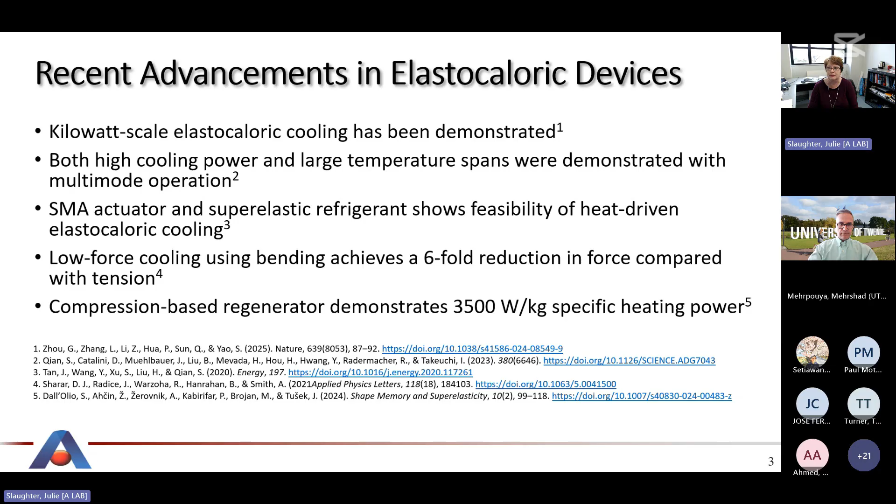So then you apply a field, the material heats up, and then you transfer that heat to an external heat exchanger. Then your material is back to that ambient temperature. Then when you remove the field, it cools off.

So now you're cooler than you started, and then you absorb heat from a load, another heat exchanger there. So you go through that cycle, and you can build up a temperature span larger than the material itself. If the material's own delta T is 5 degrees Kelvin, you can generate a temperature span 3 to 4 times that quite easily—so 15 to 20 Kelvin. That's a reasonable span for refrigeration, air conditioning, and heating. So that's a basic description of active elastocaloric regeneration.

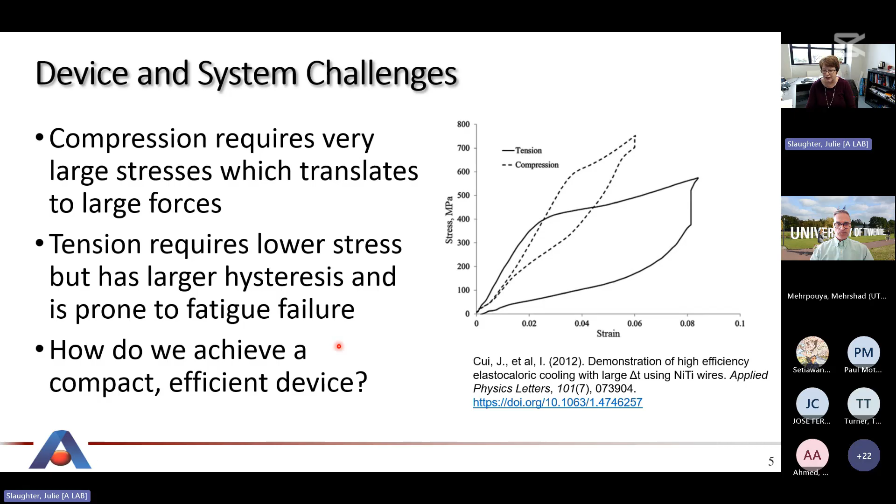So we're looking at how to achieve a compact, efficient device with the materials we have today. I want to start by talking about that big heavy piece of the system, the actuator—how do you apply the fields? A basic comparison is the energy density of the elastocaloric material, what it requires, versus what actuators are available.

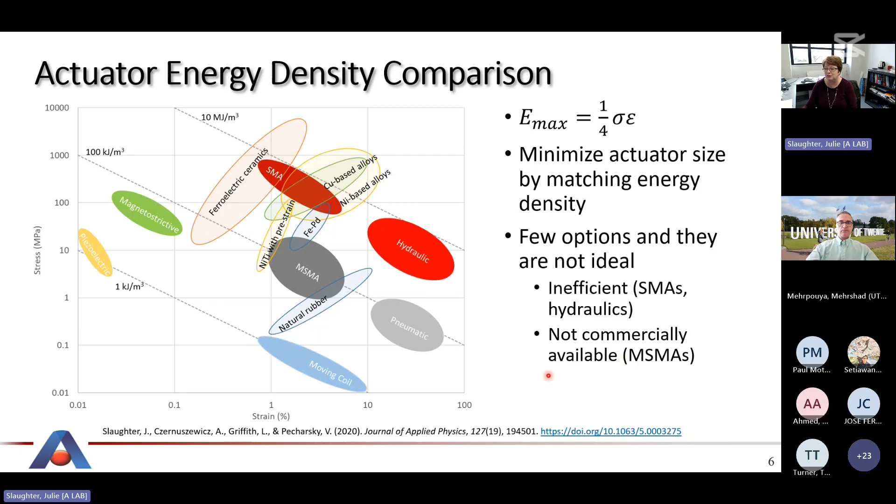None of them are ideal. The two that kind of fall in the best category here, shape memory alloys and hydraulics, are not very efficient. And then magnetic shape memory alloys are not commercially available. Pneumatics, again, not very efficient. So we need another metric to look at here.

So we're going to look at power density next, and this brings frequency into the equation. This kind of takes advantage of the fact that you can operate indirectly on the elastocaloric material at the system level, gearboxes, lever arms, things like that. So this brings rotary motors into the actuation. You're not just working with something that directly stretches or compresses the material.

So here, rotary motors are actually a really good fit because you can change the frequency with the gearbox. That makes them, and they're ubiquitous, so that's kind of where we're leaning to drive this, is how do you figure out how to use rotary motors. You don't want to use magnetostriction or piezoelectric. There's not a good way to translate the frequency into power density.

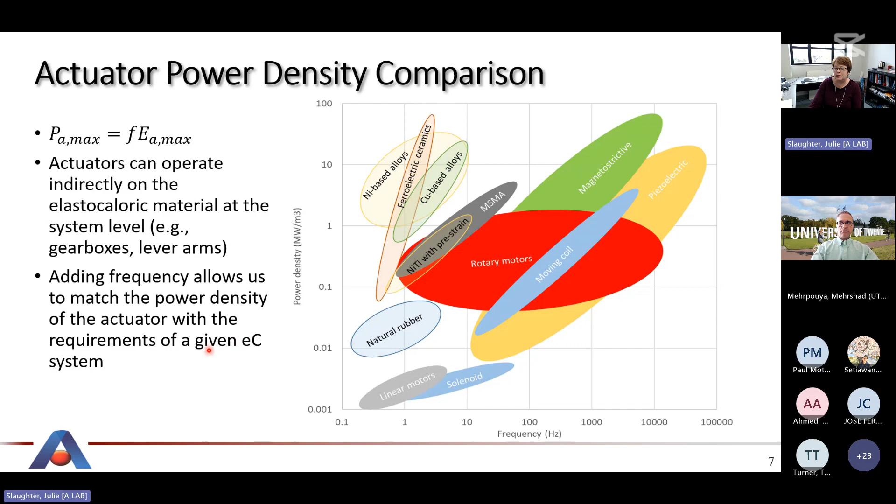So that's just a couple different ways to look at how you design the system and how you match actuators. So really, when you approach the device design, the materials inherently have a high power density. And so you really want the actuator power density to match that as best it can, so that you can minimize the size of the system.

And then another important point is that energy recovery and pre-strain can help minimize the size of the driver. What we mean by this is when one elastocaloric element is loading, another one is unloading, so you're recovering that mechanical energy.

Second point I want to look at here is at this initial stage of developing new technology, we need to see what materials are out there, what can we use that's off the shelf. Super elastic nickel titanium materials are commercially available in several different forms: wires, sheets, tubes. There's probably even billets, but this is really tailored for medical applications. So right now it's expensive, but what I want to point out here is there is a growing interest in tailoring materials for heat pump applications.

So really, I think the cost will come down, because if this takes off in heating and cooling, that's an enormous market that will in fact completely overwhelm medical applications. So I think there is interest from companies out there for that.

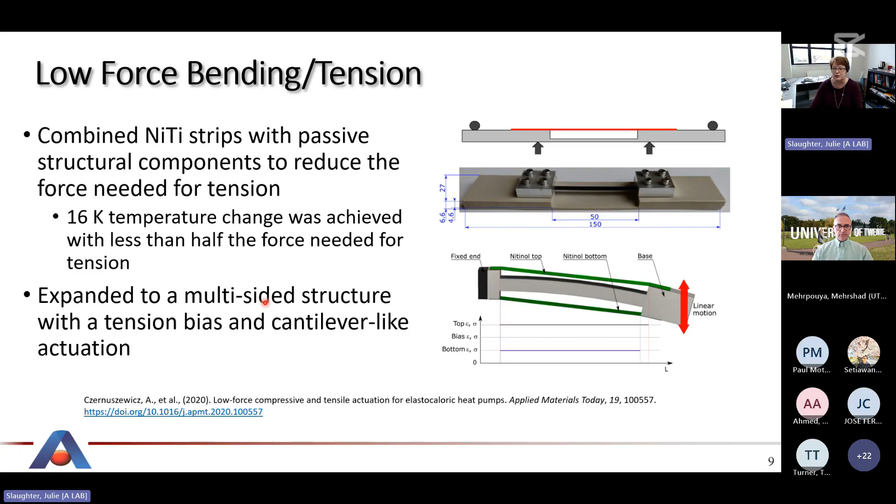So you actually now have multiple elements, so you can have more of a continuous operation of the system. That's kind of where we started with some of our ideas on that. And we looked at this concept and said, okay, are we achieving high power density? How is this at the system level?

And so we want to at least be at that same level for elastocalorics in order to really start to be a commercially viable system. So what we looked at in this double-sided structure is how much material volume, and we ignored a lot of the structure, but we did say, okay, what is the active material volume to motor ratio? And we achieved a very good result of just under 4 to 1.

Looking at some of the other systems, one was a heat-driven system, the other used Terfenol-D, a magnetostrictive material. So you can see we're actually in really good shape. There are other systems out there that are probably much better. This was a fairly old result, so I'm sure everything has improved by this time. But that's really where we're aiming, to get to that same type of ratio for the motor volume to the active material volume.

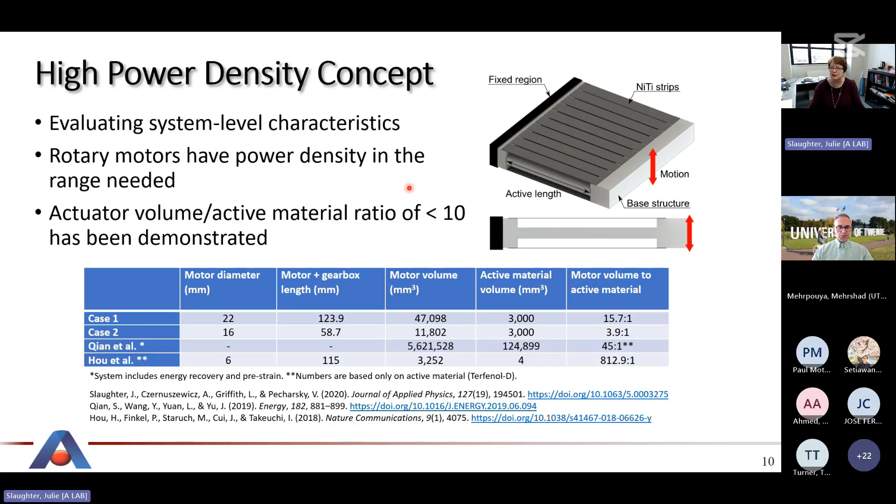Now I want to talk specifically about one of the projects we have here at Ames Lab, and this is elastocaloric cooling for military vehicles. What I want to point out here is the military has a strong pain point. Their current refrigerants are being phased out, but the leading alternative for vehicle air conditioning has a risk of sustained burning, which I guess they've decided is okay for passenger vehicles, but that's not acceptable for military applications. They're also concerned about other refrigerant blends that break down into harmful chemicals such as PFAS. So this is their motivation for wanting something different.

Our project was selected for funding under this, and we're evaluating elastocaloric cooling with 3 main goals. One is to optimize nitinol alloys for cooling, and our main goal there is to reduce the stress-strain hysteresis and fatigue while still maximizing caloric performance. Second is to demonstrate active regeneration and see if we can meet the temperature span and efficiency requirements. Third is to demonstrate a 500 watt system.

So that's where we are, we're in the middle of this, working on all three efforts right now. A little bit of what we've done for the materials: we're partnering with a couple different companies, ATI and GRAL, who we're working with to optimize the materials. The material we selected already has low inclusions and good fatigue.

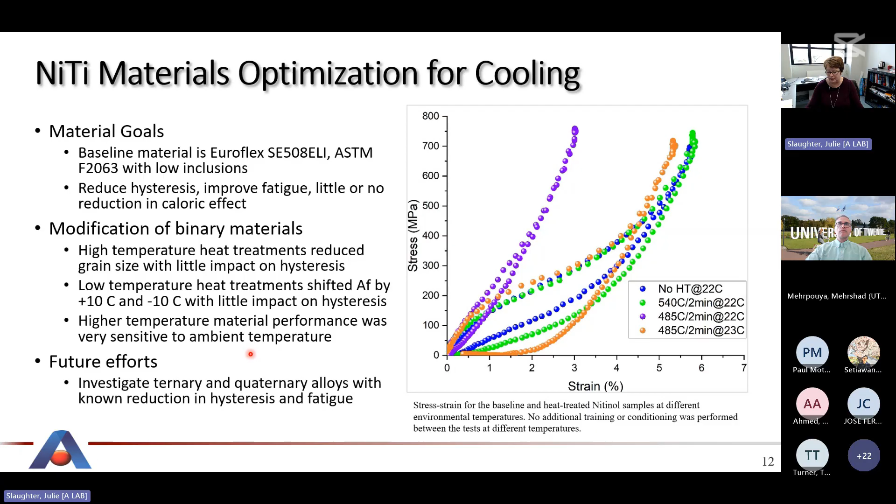We are going to start moving to ternary and quaternary alloys to reduce the hysteresis and fatigue. So that's really where we are with our materials effort.

Then we're going to move to the active regenerator design concept. This is a little complicated, but what we've done is taken our bending tension concept, where we have this passive beam in blue. We're applying a bending moment. This is a fixed end. And then we have a stack of plates, so instead of just having one single plate on each side, we're actually putting tension on a whole entire stack of plates.

What this does is a couple things for us. One, it increases the amount of active material we have in our structure. Secondly, it makes a nice parallel plate heat exchanger, so this is a good structure for heat exchange. To address the fatigue issue, we're really operating at a bias strain and then operating a fairly low oscillating strain around that.

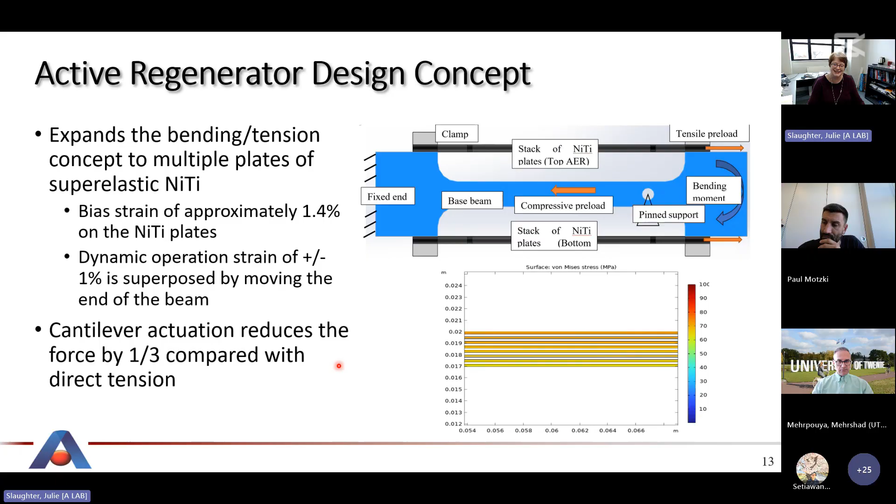So we have a strain of 1.4% that's a bias, and then we're plus or minus 1% on that. That gives us a temperature change in the material of about 5 to 6 degrees Kelvin, which is sufficient for our ultimate goal. In our finite element analysis, we found we've got about 2/3 of the force that would be needed for direct tension, so we've reduced it by 1/3, meaning it's 67% of what we would use otherwise.

So we did some active regenerator modeling. Our target for a single regenerator is 125 watts at 0 span and 25 watts at 25K span. The plate thickness we have is 200 microns thick, with 50% porosity, so they're spaced 200 microns apart. With 100 grams of nickel titanium, we can exceed that target performance we're looking for.

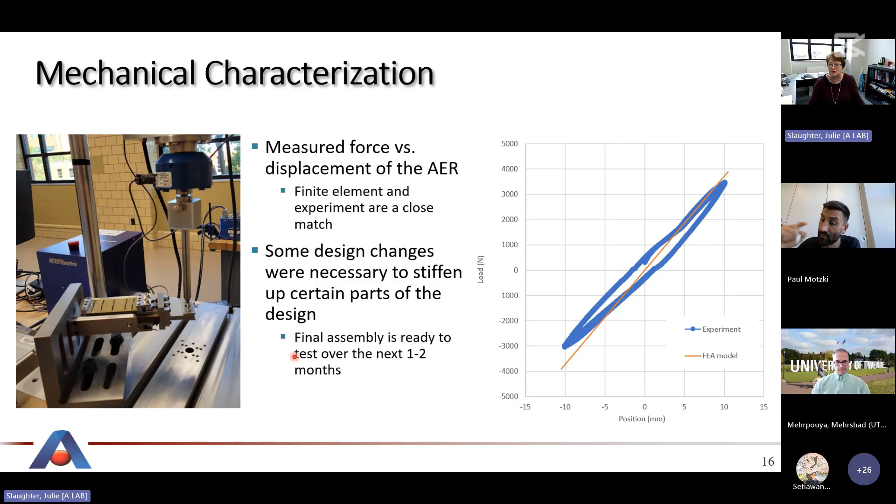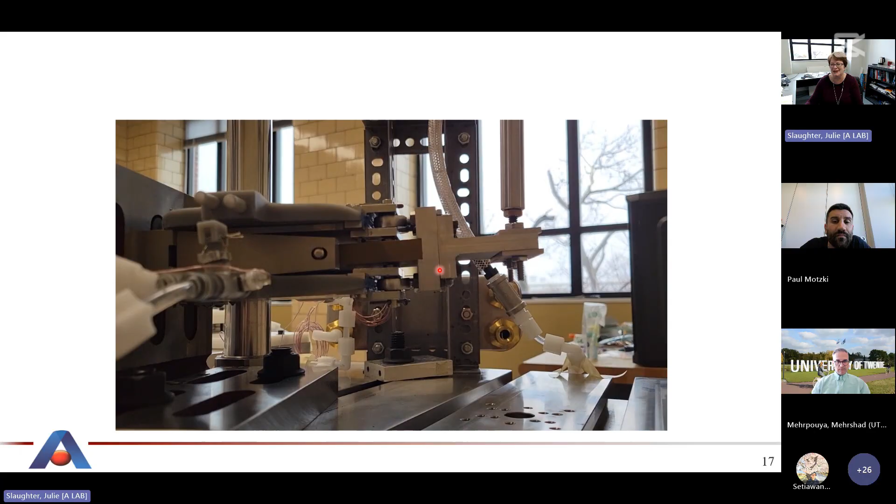Let's see if the movie will actually work. So this is the thing in action. You can see right here, there's a mechanical joint opening up and loosening, and if you look, there's a drip of water underneath. So right now we're struggling with sealing the fluid connections and having a little bit of mechanical problems.

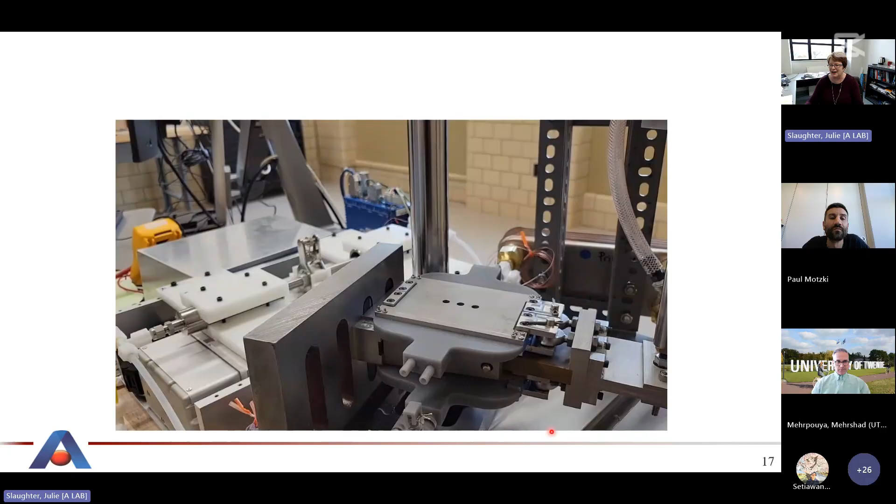But that's where we are today. So we're in the midst of fixing those issues right now, finding the seals and making sure that we can get this to work. So it's a challenge, but we're getting there.

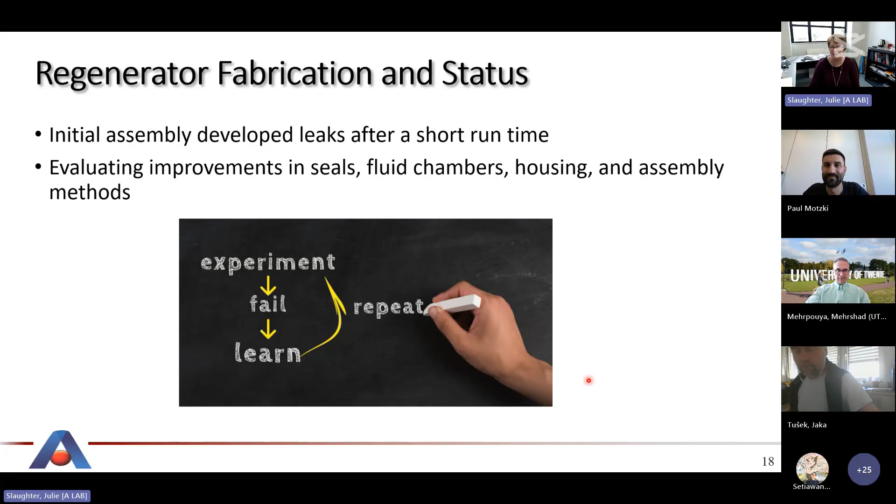In the meantime, we're looking at that next level. What does the system look like? It's going to have multiples of these regenerators. They're probably not going to look exactly the same, but this is a kind of cartoon of the final size of 500 watts. If we reach our 125 watt goal, we'll require 4 regenerators.

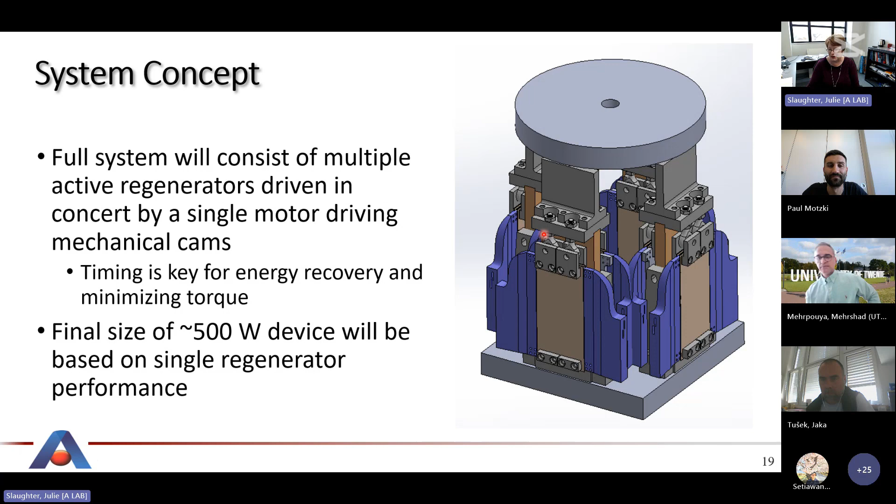So the next thing we looked at is how do we achieve energy recovery with that, because if you drive all 4 of those at once, you're just going to increase the amount of torque you need by a factor of 4. You can do a little better than that if you have, say, a single cam with 3 lobes, which can reduce it by half. But you're still not getting true energy recovery, so what we're looking at now is driving each of those regenerators independently.

So we can actually demonstrate, and this is just models at this point, that we are getting some energy recovery from the system. I think this would be improved if you had more regenerators and improved the timing even more. So that's kind of where we're starting with that.

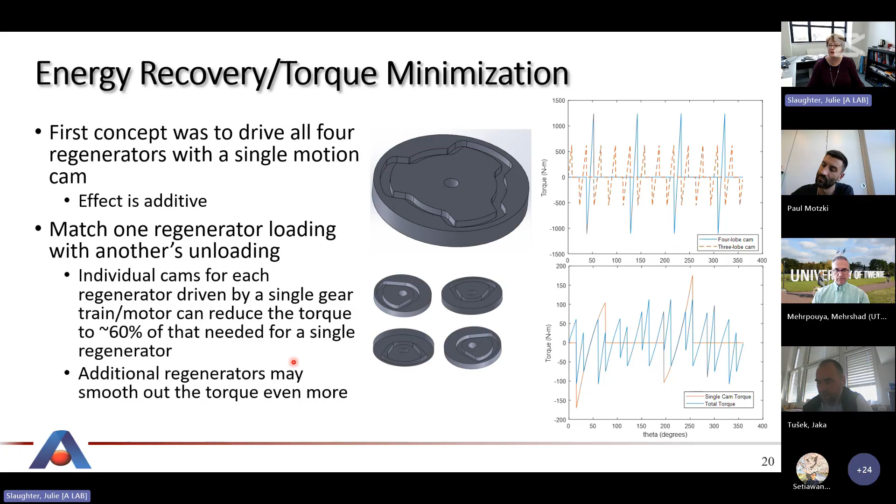I did want to just mention, not going into any details on this, but we are working with a small company that's using bending, which is an even lower force.

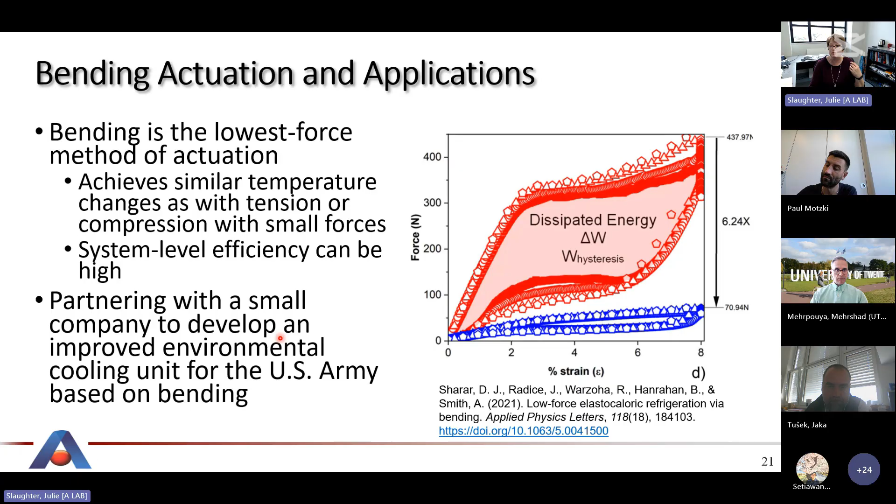I mean, direct bending of the nitinol. And this, you know, you still can get a 6 times reduction in force, and get the same temperature change in the material. So we're partnering with a small company that's developing some cooling systems for U.S. military based on that concept. So there are some good, exciting things.

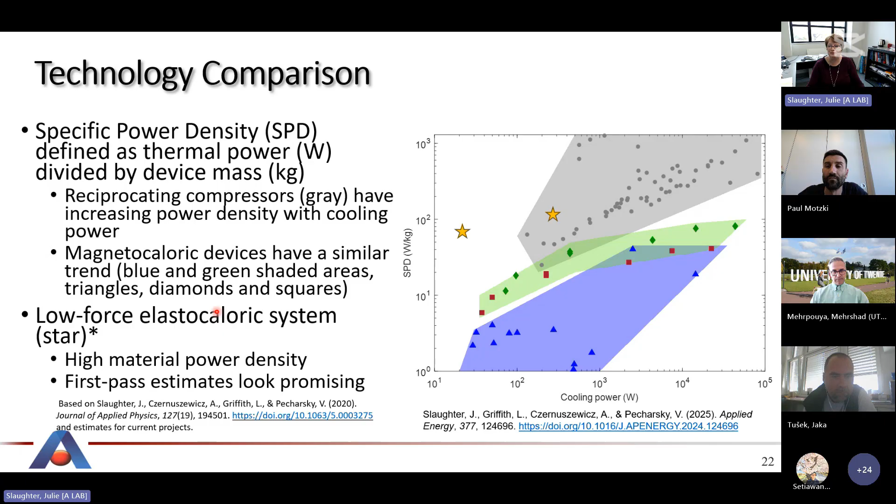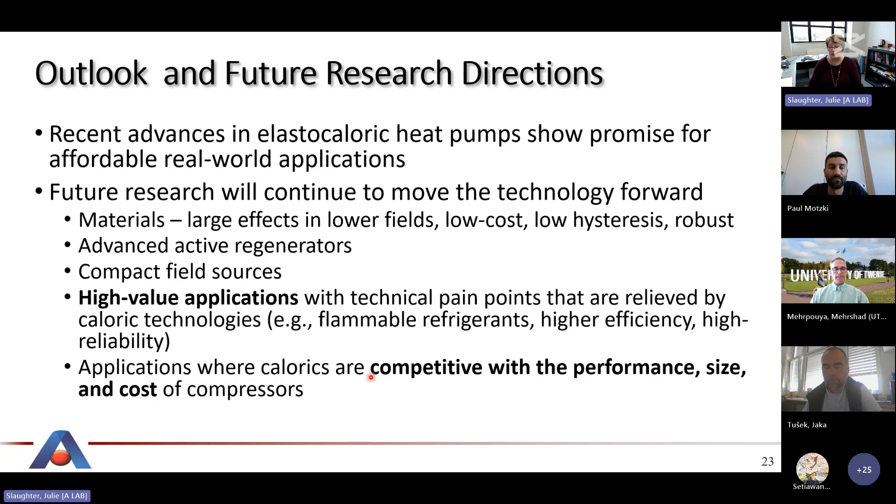So, wrapping up here, outlook and future directions. There's a lot of recent advances that show promise for real world applications, but there's still improvements needed in the materials, improvements in regenerators, a lot of different issues and approaches out there. Some people are using compression on tubes and different configurations. So really there's a lot of options and good directions moving forward. I want to point out that if we're looking for applications, let's start with high value applications where they have a pain point, particularly like our military applications. And then second, where is it competitive with performance, size, and cost? So I'm going to leave it with that.

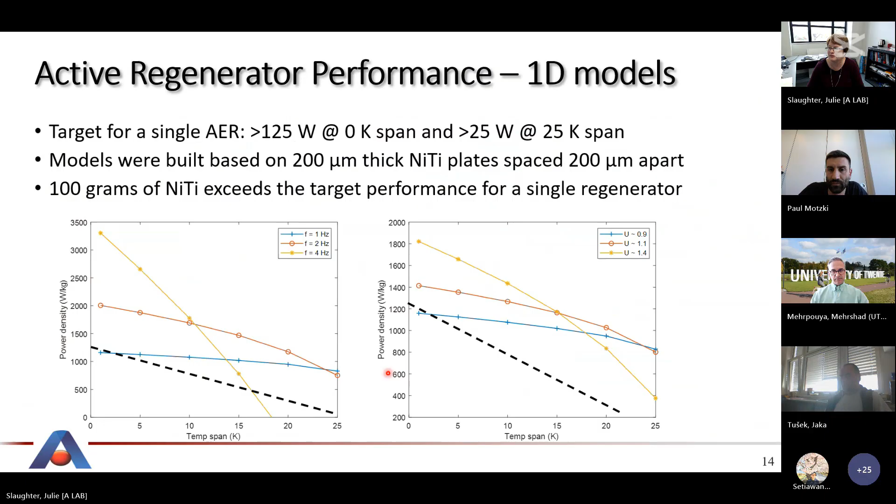Okay, that's a great question. So what makes them good heat exchangers? Let's go here. Because it's a solid metal, you need it to be in a porous form. This is why when we have multiple plates, you now have a parallel plated heat exchanger. So what you do is you're flowing a fluid through that porous structure. And then there is an external heat exchanger that exchanges the heat with the environment. So it's a two-step process: one, you're absorbing the heat from the active material, and then you're expelling that heat through a secondary heat exchanger to the environment, if that makes sense.

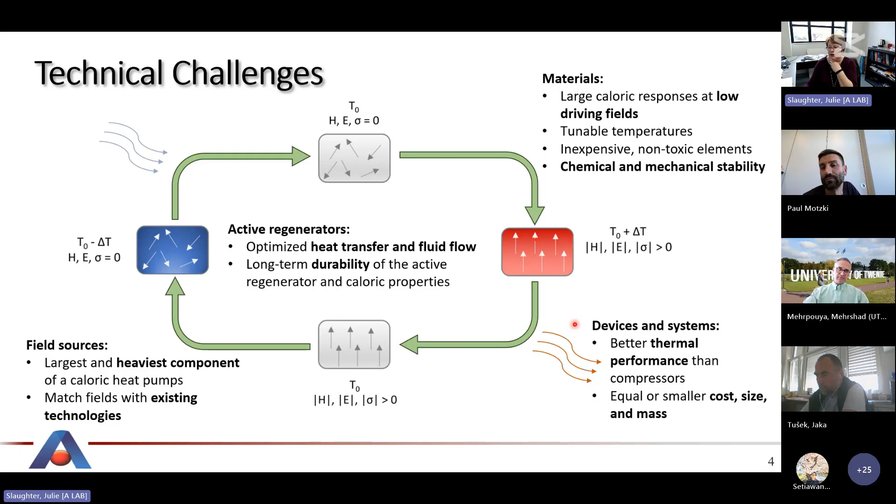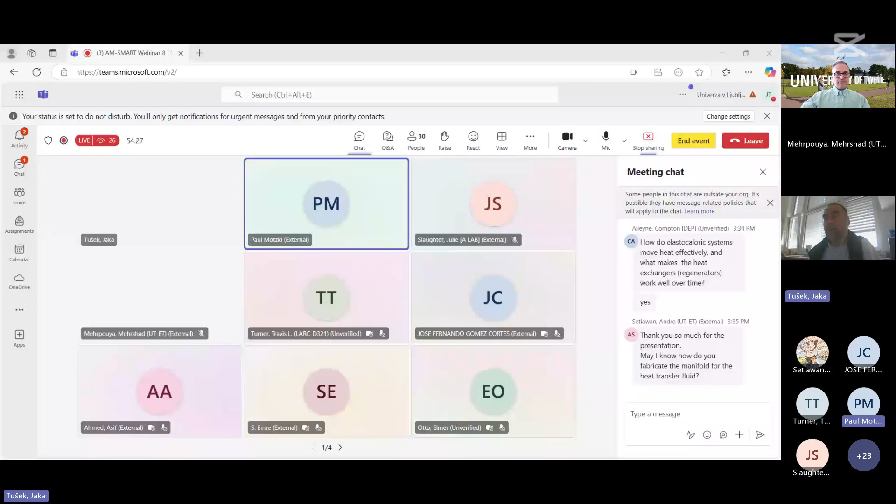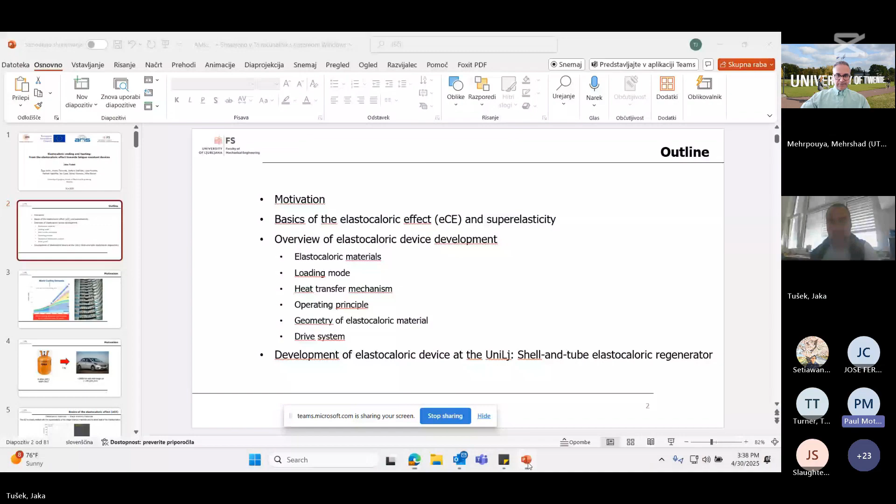Hello, can you see me and hear me well? Okay, and you can also see my screen, I hope. Right now we see the Teams window. That's strange. Let's try again. Entire screen - yeah, sorry, okay, now it should work. Is it coming? Yes, now it's your view, not the presentation. Yes, now it's in presenter mode. Okay, perfect. Thank you, and first of all, sorry for the delay - I had some issues with restarting the computer and updating Teams. So thanks, Julie, for stepping up.

Okay, so thanks for the introduction and for the invitation, of course. It's my pleasure to be here and to give my talk at this seminar. So the talk will in principle be divided into three parts.

At the beginning, in the first part, I will very briefly talk about the motivation behind this work and the development of new refrigeration technology in general, and give the basics of the elastocaloric effect. Then in the second part, which will be the main part of the talk, I'll give an overview of different segments crucial for the development of efficient, powerful, and fatigue-resistant elastocaloric devices - from elastocaloric materials, loading modes, heat transfer mechanisms, operating principles, to geometries of elastocaloric materials, and finally the driving system.

In the third part, I will very briefly present the main results of the development of a fatigue-resistant elastocaloric regenerator, as a key element of the elastocaloric device, which was built and tested in our lab.

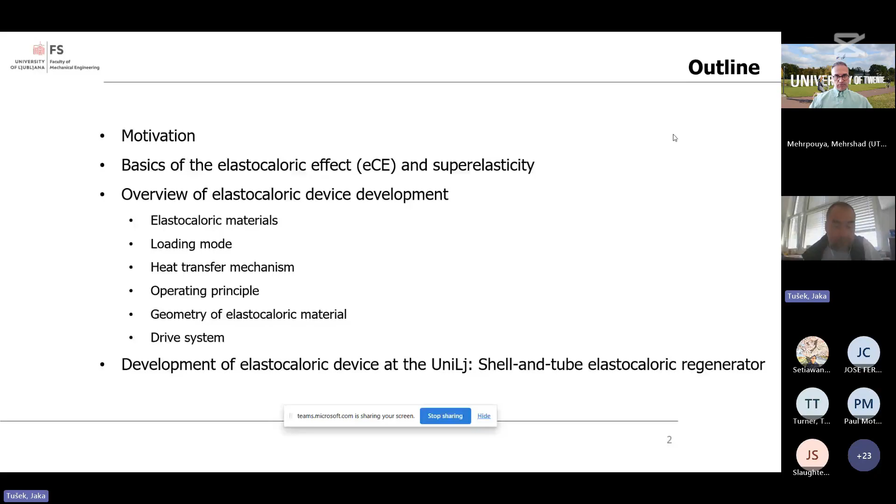So at the beginning, let's briefly say a couple of words about the motivation behind this work, and the motivation behind the development of new cooling technologies in general. As you can see from this plot, the energy demand for cooling and particularly air conditioning is growing exponentially and is projected to triple in the next 30 years.

But our standard cooling and heat pumping technology, called vapor compression technology, is old, relatively inefficient, and still uses environmentally harmful refrigerants. These refrigerants are no longer ozone-depleting chlorofluorocarbons, which caused significant problems 30 years ago, because these were phased out according to the Montreal Protocol and replaced by hydrofluorocarbons, which, as was demonstrated later, have enormous global warming potential.

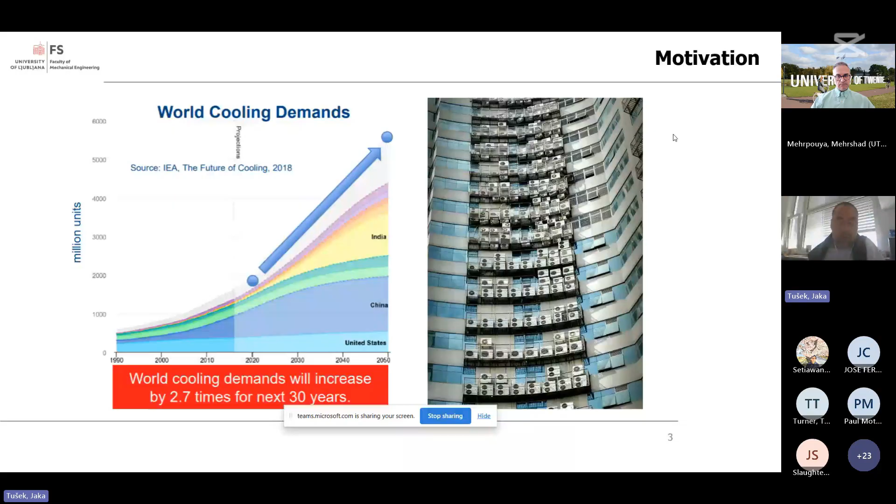I really like this example, which clearly shows that if only 1 kilogram of the most commonly used refrigerant at that time, R404A, leaks into the environment - and 1 kilogram is roughly the amount a typical air conditioning device contains - this causes CO2 emissions equivalent to driving about 30,000 kilometers with a mid-range car.

And people are always talking about how driving a car is problematic for the environment, but not talking so much about refrigerants. So following the Kigali Amendment to the Montreal Protocol, these refrigerants with enormous global warming potential, which can be several thousand times larger than CO2, will need to be phased out in the near future and replaced by natural refrigerants only.

These are either butane or propane, which are highly flammable and not allowed in larger quantities, or ammonia, which is toxic, or CO2, which has low efficiency in hot climates. So these are some very important limitations of both conventional refrigerants, such as hydrofluorocarbons, and natural refrigerants, which cause different safety issues. These are very serious limitations, and it's really a call for benign solid-state technologies.

Currently, so-called caloric cooling - among which we know magnetocaloric or magnetic refrigeration, electrocaloric, elastocaloric, and barocaloric - has shown, in the recent 5 to 10 years, the most potential for wide applications and as a real alternative to vapor compression technologies. So let's now focus on elastocalorics, which show some very promising results in recent years.

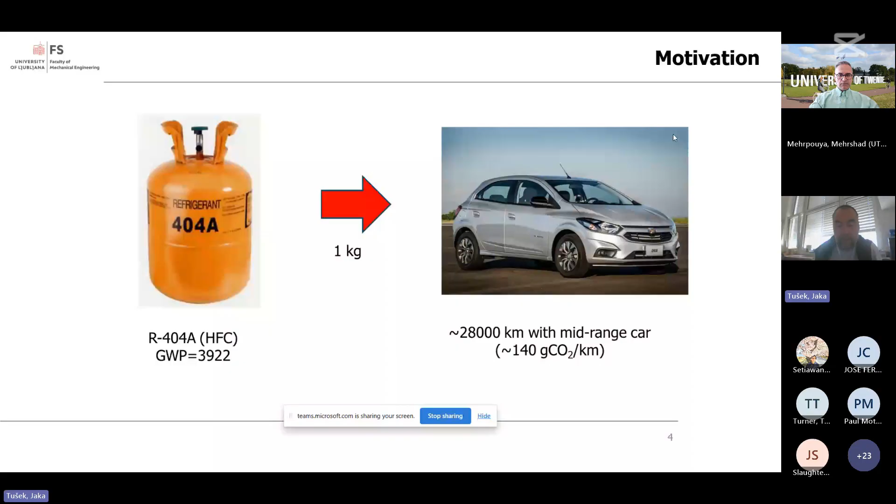So first, let's present briefly the elastocaloric effect, which is the basics of the elastocaloric technology. The elastocaloric effect is most pronounced in shape memory materials, due to Martensitic transformation, which enables two unique properties of shape memory alloys: superelasticity and shape memory effect. These are already widely applied in several engineering and biomedical applications.

The elastocaloric effect itself is closely related to the superelasticity of shape memory materials and its latent heat during the transformation. This stress-induced Martensitic transformation is exothermic and endothermic, causing latent heat release and absorption during reverse transformation. So essentially, all shape memory materials can be considered as potential elastocaloric materials.

The first step in the cycle is mechanical loading, so the material transforms from austenitic to martensitic phase. Because this is done at close to adiabatic conditions, the material heats up, and is then able to transfer this heat to the surroundings. Upon unloading, the reverse transformation occurs, the material cools down at adiabatic conditions, and this cold material is now able to absorb heat from the surroundings. If we constantly repeat those four basic operational steps, we can build a thermodynamic cycle and essentially a cooling or heating device around this elastocaloric effect.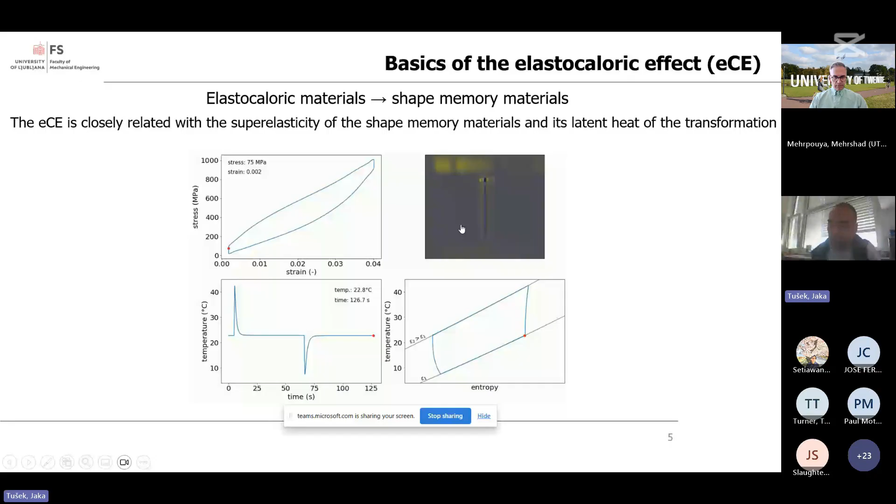This figure shows an overview of different segments that are crucial for the development of efficient, powerful, and fatigue-resistant elastocaloric devices. In this second part of my talk, I will go through all six segments in more detail, mostly based on our results, presenting an overview of the main challenges of these different segments.

The first thing to talk about is the elastocaloric materials. Since elastocaloric materials are essentially shape memory materials, we can divide them into groups just as in the case of shape memory materials: nickel titanium based alloys, copper based alloys, iron based alloys, magnetic shape memory alloys with both martensitic and ferromagnetic transitions, and also shape memory polymers.

The most widely used, both in terms of superelasticity and shape memory effect but also elastocaloric effect, is binary nickel titanium alloy, which can have very high adiabatic temperature changes up to 25 kelvins upon loading and unloading, but also requires relatively high stress for the transformation, and has very significant hysteresis, which is a disadvantage.

It was shown, for example, that copper-based or magnetic shape memory alloys can have much lower stress required for transformation and lower hysteresis, but also the adiabatic temperature changes are somewhat lower.

The story is different in polymers. The background is not Martensitic transformation, but rather the reorientation of polymeric chains. Polymers have very low transformation stress required, but also very significant strain. So it might be a bit unpractical that the elastocaloric device requires 600% strain, but the elastocaloric effect can be quite decent, up to 10 kelvins.

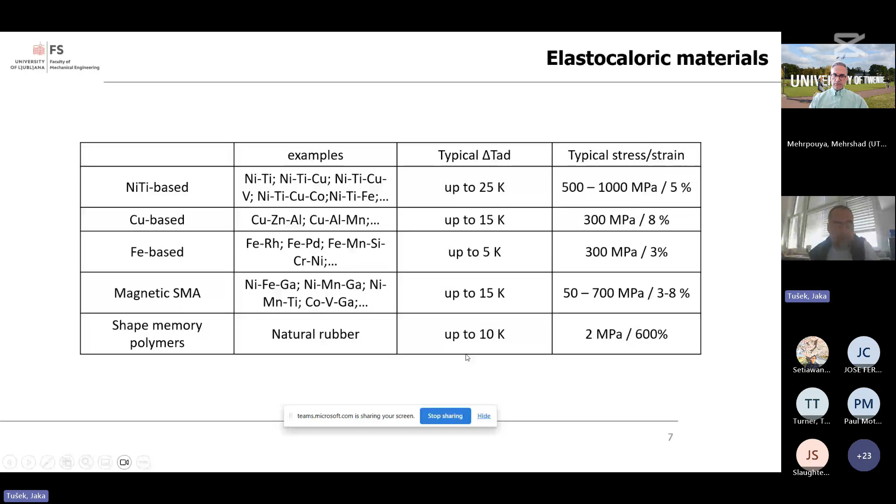It should be noted that nowadays elastocaloric materials, mainly binary nickel titanium alloy, have not been developed for elastocalorics, but for other applications such as actuators or biomedical applications. So it's not optimized for elastocalorics. There is significant room for improvement in the development of elastocaloric materials.

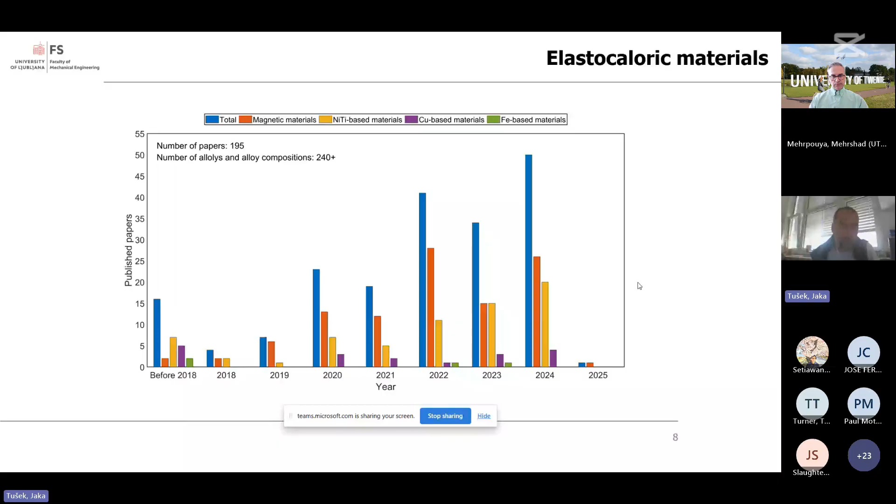This is a ratio between the latent heat of the transformation, which can be calculated through the adiabatic temperature changes, versus the hysteresis losses at adiabatic conditions. As such, the COP of material presents the maximal possible limit up to which a potential device could operate.

But in reality, the COP of the device is much smaller compared to the COP of material, because the device includes other losses as well, such as friction losses, viscous losses, heat transfer irreversibilities, and also the losses related to the enlargement of the temperature span along the device. So unfortunately, the COP of device will be lower than the COP of material.

So when people say the COP of elastocalorics can be up to 40, they normally talk about the COP of material and don't include other losses in their evaluations.

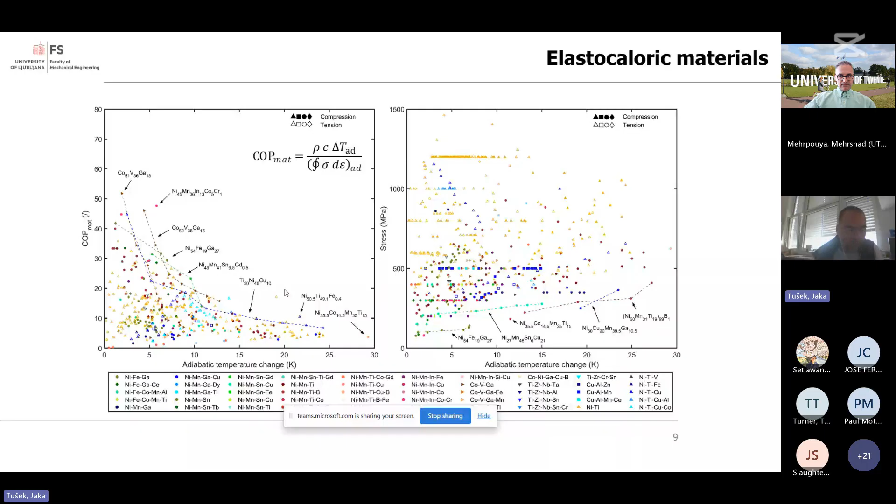Okay, the next important thing is the loading mode. In principle, we can distinguish between tension and compression loading. But from the engineering point of view, this means someone needs to deal with fatigue in case of tension, or with buckling in the case of compression.

Both tension and compression have some pros and cons for elastocaloric technology. The main advantage of tension loading is the ability to apply thin elements, so thin wires or thin sheets, with good heat transfer geometry, so thin walls, large specific heat transfer area, and so on.

While the main disadvantage of tension is reduced fatigue life, especially compared to compression. Because in tension, as shown here, any cracks or impurities in the material will already grow and expand during loading, while in compression, those cracks and impurities are getting closed, which can significantly prolong fatigue life.

But the problem is that it's impossible to simply compress a thin sheet or thin wire without buckling issues. So it's very challenging to come up with a geometry that can have efficient heat transfer but at the same time has buckling resistivity.

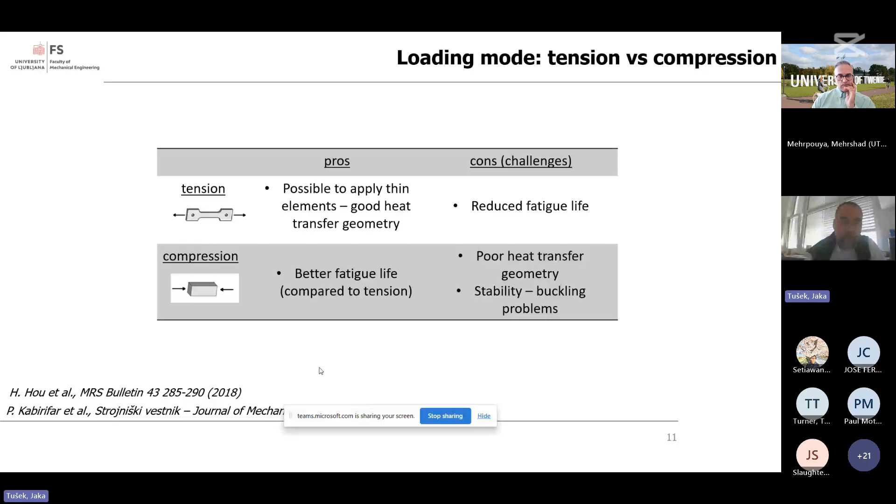But fatigue is not the only difference between tension and compression, as was shown before as well. It's well known that especially in nickel titanium alloys, there's significant tension-compression asymmetry. In tension, smaller stress is required for the transformation, but larger strain, while in compression, you need larger stress, but smaller strain. However, in both cases, if the transformation is completed, adiabatic temperature changes of about 25 kelvins can be achieved, but in compression you need larger stress for that, while in tension you need larger strain.

The difference is also in the homogeneity of the elastocaloric effect over the sample. In tension, the transformation proceeds through Lüders bands, which can be highly inhomogeneous, especially if only partial transformation is applied, while in compression, the transformation can be much more homogeneous, with homogeneous distribution of the adiabatic temperature changes over the sample.

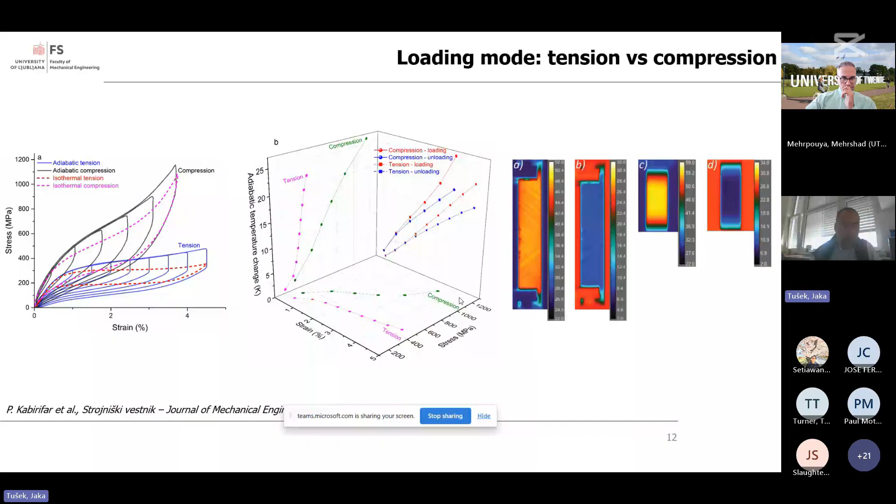So in recent years, an important part of our work has been focused on studying fatigue and buckling of elastocaloric materials. We have developed a new experimental setup for comprehensive fatigue testing of elastocaloric materials, where samples are monitored from one side with a thermal camera to measure temperature responses, and on the other side with a digital image correlation camera to measure strain distribution over the samples.

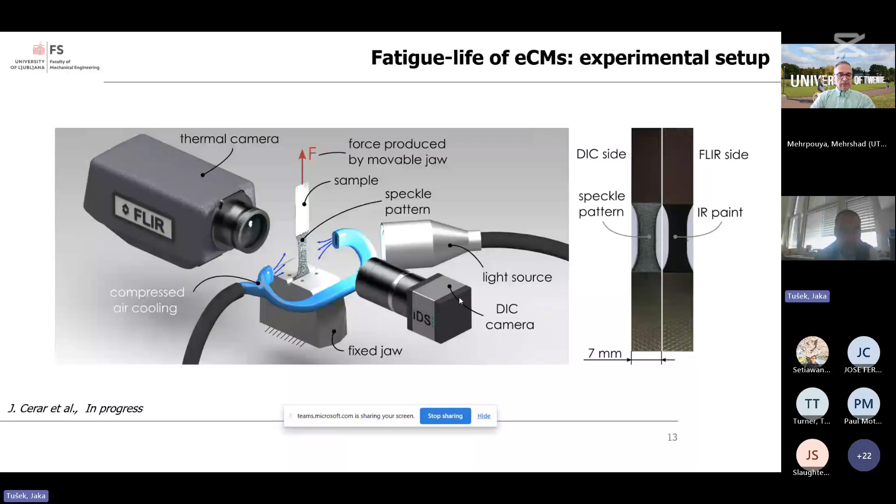We first studied fatigue in nickel titanium tubes in compression, but before any characterization, we first perform so-called mechanical stability or training of the material, where in the first 100 cycles there is quite significant degradation of both the elastocaloric effect and superelasticity. But after roughly 100 cycles, the response is stabilized and can be reproducible, which is crucial for elastocaloric devices.

So after training, we then subjected a couple of tubes to fatigue testing, and over almost the entire transformation plateau, all the tubes survived. The tubes were stable enough without buckling, which is a precondition for functional operation. And if they are stable, they don't show any structural fatigue up to 1 million cycles.

What was even more important and optimistic is that there was no functional fatigue either, because when comparing only trained and fatigued tubes, the elastocaloric effect was almost identical, which indicates that after training, there's no degradation of the elastocaloric effect, which is again crucial for elastocaloric devices.

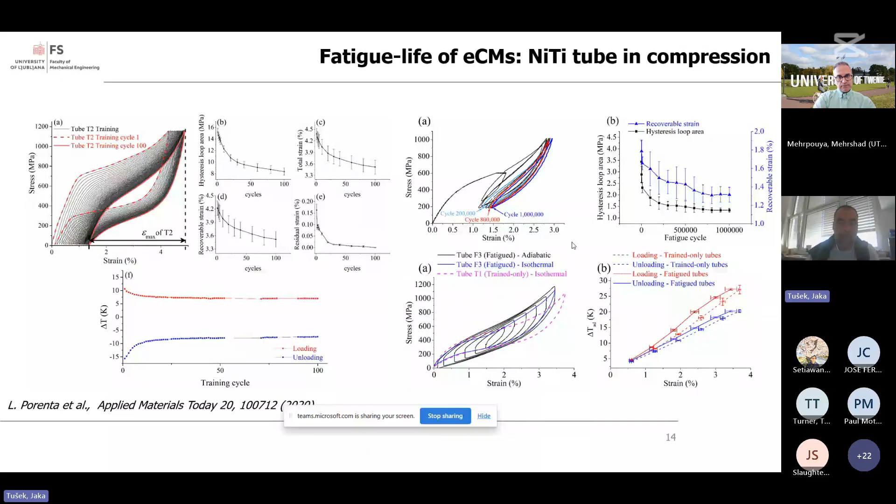The thing is, of course, things are much less straightforward in tension. We are currently running very comprehensive testing of nickel titanium sheets in tension. The idea is to systematically change the mean strain and strain amplitudes on the samples, while simultaneously measuring temperature changes and strain field over the sample.

An example of stress-strain response during cyclic loading is shown in this video, and this sample survived the run out, which was set at 1 million cycles. You can see local strain up to 5% and adiabatic temperature changes up to 7 kelvins, which is quite promising, but only locally. Of course, if the strain is larger, then at some point the sample fails due to crack propagation as shown here.

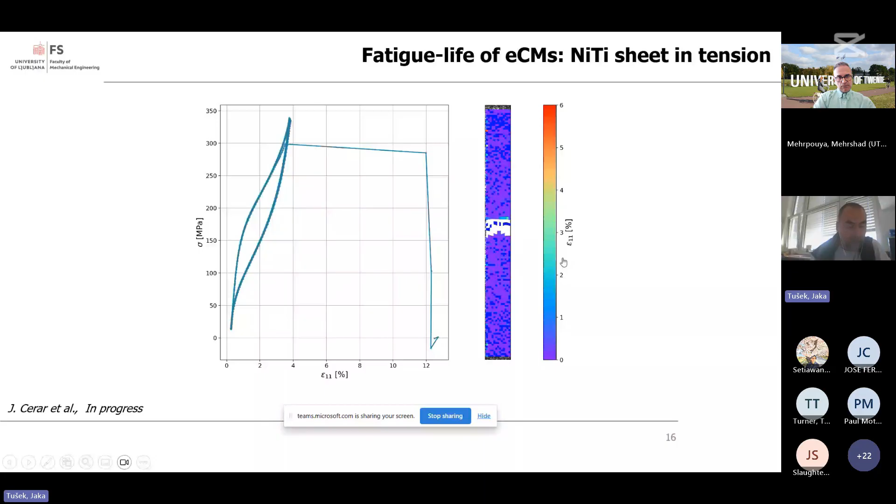Based on these results, we are currently constructing a Haigh diagram as shown here. Left-hand side shows pure compression, right-hand side shows pure tension. This plot shows the samples that survived in blue and that failed in red, meaning they didn't reach 1 million cycles. As you can see, in compression, all the samples cycled over almost the entire transformation plateau survived 1 million cycles, with adiabatic temperature changes up to 25 kelvins. Please note that due to asymmetry, the strain to complete the transformation is lower in compression compared to tension, while strain amplitude is half of the total strain.

So again, things are much more complicated in tension, but we are now able to approximate the fatigue limit line, which is not straight. There's an area corresponding to the middle of the transformation plateau that can have larger strain amplitude compared to other regions. In this area, a strain amplitude of 1%, which is plus minus 1%, meaning 2% total, actually corresponds to fatigue resistant operation. You can have adiabatic temperature changes up to 8 kelvins, a bit less most probably, but in this range, which might be enough for some applications.

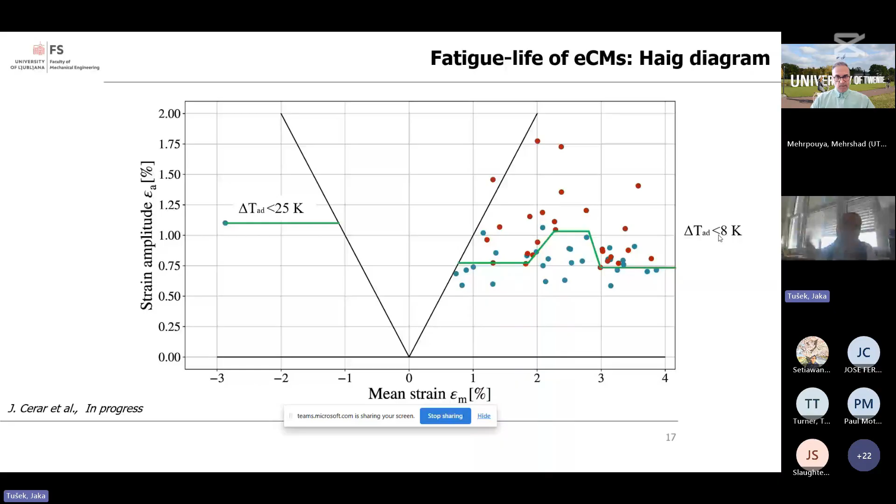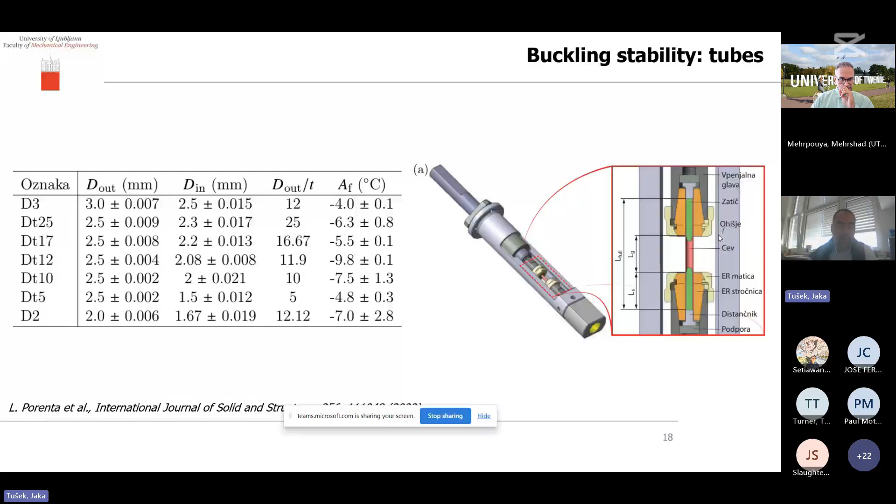Since tubes show to be fatigue resistant in compression, we then studied very comprehensively buckling stability. We tested different tubes with different outer diameters and inner diameters, and we constructed this buckling phase diagram, which shows different buckling modes of different tubes. Here we show slenderness, essentially the dimensionless length of the tube, as a function versus diameter to thickness ratio, and we are now able to detect the different buckling modes.

If the tube is thick enough, so the diameter to thickness ratio is below 15, and if it's not too long, we observe this interesting buckling-unbuckling phenomena. I have to show this here because the tube starts to buckle, but then somewhere in the middle of the transformation plateau it straightens back, and a similar thing occurs upon unloading.

So this tube actually didn't fail. It also has fatigue resistant operation, and is thus functionally stable, but shows this interesting phenomenon related to asymmetric martensitic transformation in the tube. If the tube were longer, it would buckle; if it were thinner, it would buckle locally, collapsing into itself. So this is a guideline plot which helps us select tube dimensions that show stable operation in terms of buckling in compression.

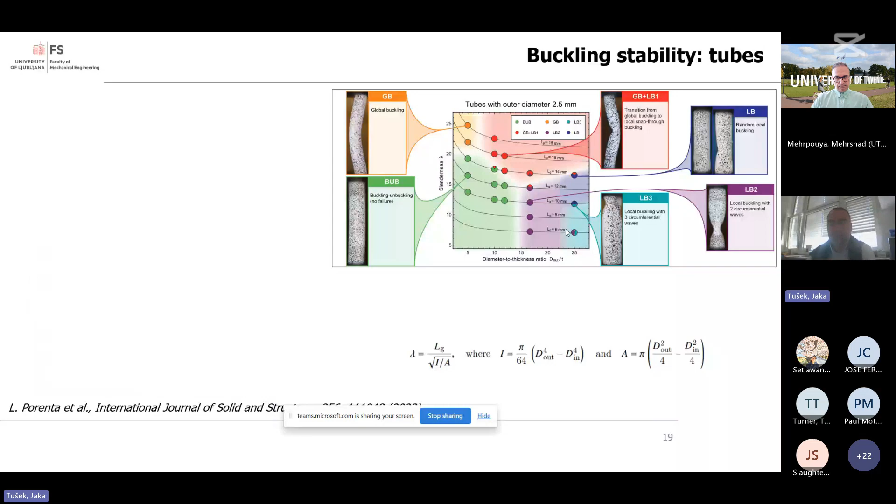Okay, let's talk briefly about the heat transfer mechanism. In principle, we can distinguish between contact and convective heat transfer. This plot shows two cycles, one for contact and one for convective heat transfer. In both cases there are 4 basic operational steps: loading and unloading, and in between those steps, a heat transfer process. In the case of contact heat transfer, you apply mechanical contact between the elastocaloric material and the heat sink and heat source.

This concept is interesting for miniaturization, for example, and can be useful for microcooling, because it's somewhat limited to rather low absolute cooling or heating powers. These systems are being developed in Manfred Kohl's group at the Karlsruhe Institute of Technology.

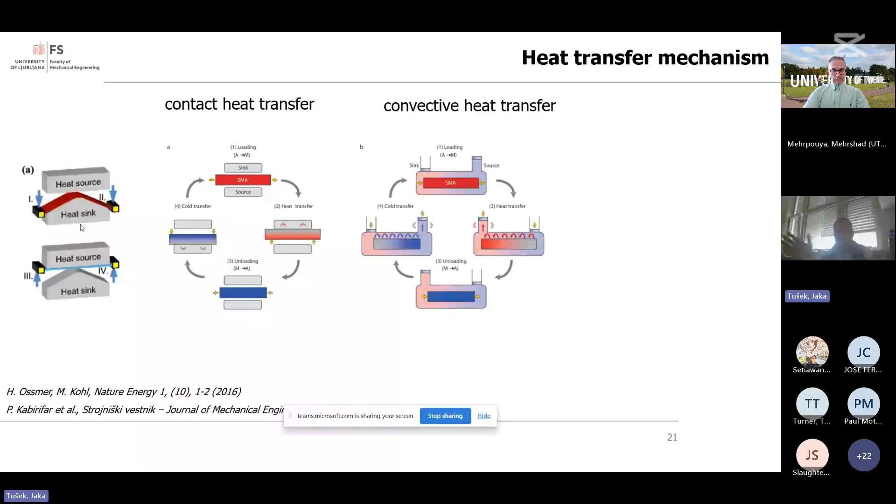On the other hand, convective heat transfer applies macroscopically porous materials like regenerators, through which a heat transfer medium can be pumped in the counterflow direction, and can essentially provide larger absolute cooling or heating powers because they contain a larger amount of elastocaloric material.

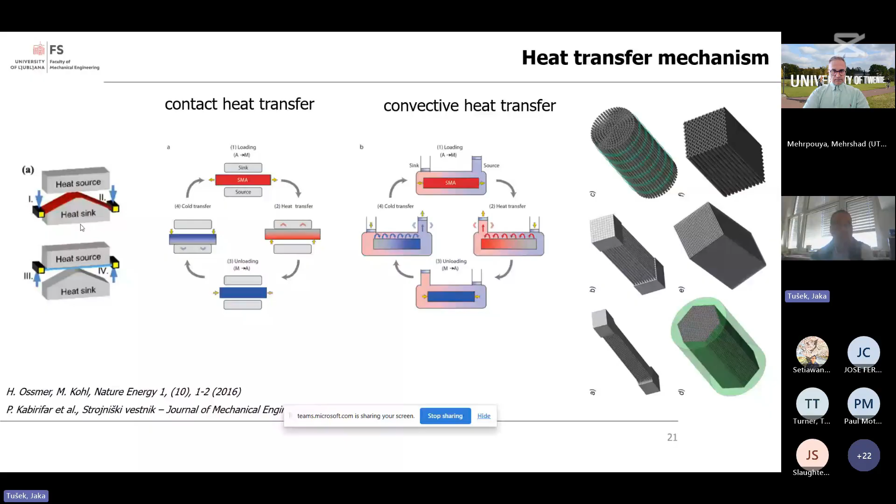In an active regeneration cycle, each particle of the elastocaloric material in such a porous structure performs, at the right operating conditions, its own thermodynamic cycle at slightly different temperatures, which means you can pump heat at lower temperature compared to ambient. In a single stage cycle, the entire material performs the same thermodynamic cycle, which means you cannot establish a temperature span over the device - it can only operate around the surrounding temperature.

So for the majority of applications, in the single stage cycle the temperature span is limited by the adiabatic temperature change, while multi-stage cycles such as active regeneration can enlarge the temperature span beyond the adiabatic temperature change, which is crucial for most practical applications requiring a temperature span of 20, 30, or even 40 kelvins.

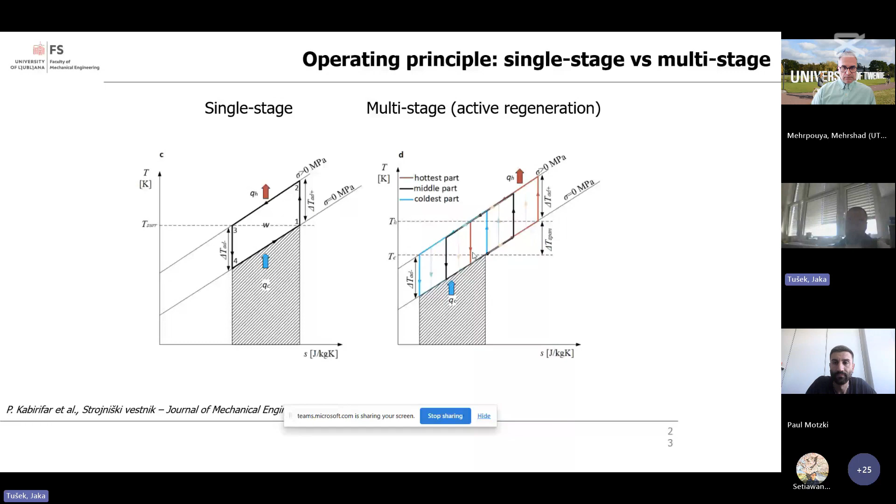The system is also connected through a hydraulic system to a heatsink and heat source, here the hot and cold heat exchangers. We also have a piston pump to move the fluid and four check valves that control the fluid flow through this regenerator.

The first step is loading, then pumping the fluid through the channels of the elastocaloric regenerator when the material is heated up, so the fluid is heated and can reject heat to the surroundings. The third step is unloading, so the material cools down due to the elastocaloric effect, and then we pump the fluid in counterflow towards the cold heat exchanger, when this cold fluid is able to absorb heat from the surroundings.

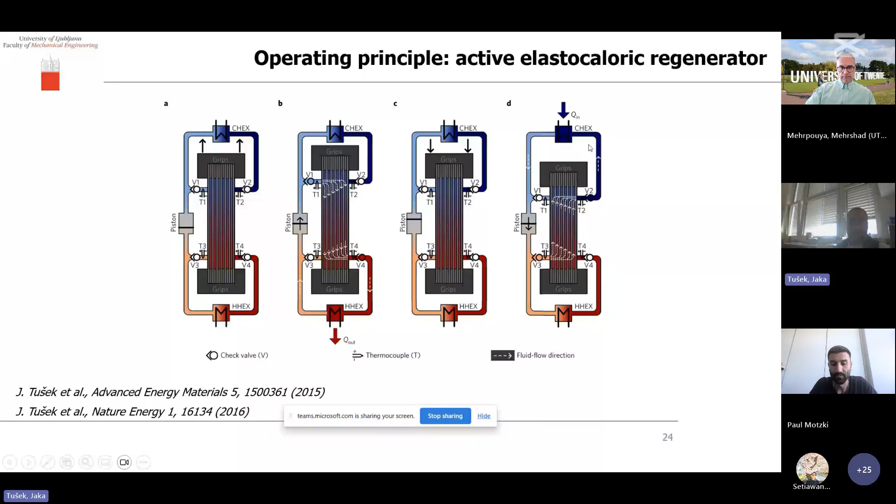We can see that after a certain number of cycles, a temperature profile gets established along the length, and we can build a temperature span of 20 kelvins, in this case, between the cold and hot side.

The system worked nicely, but due to fatigue, because we exceeded 2% strain, it failed after about 7,000 cycles, which is obviously not enough for any practical applications.

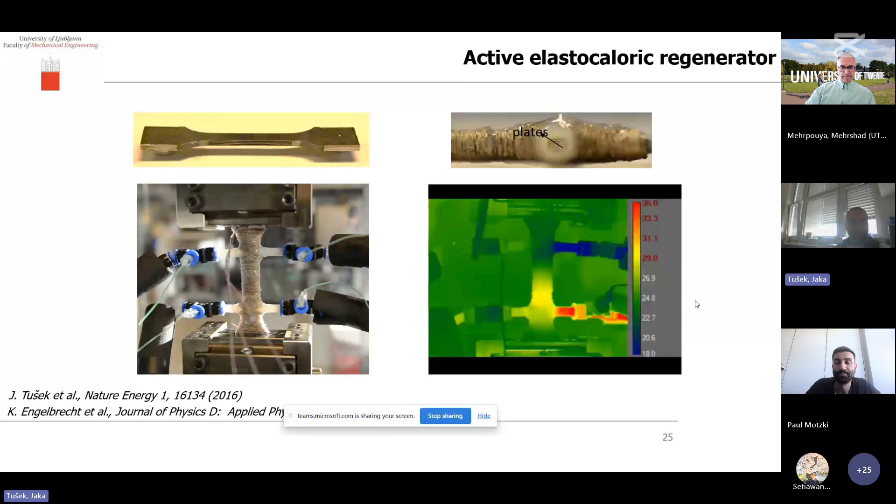So now the challenge is to develop a proper geometry, as I also mentioned previously. Let's take a look at how the geometry of elastocaloric material should look.

In principle, these are some examples from sheets to wires, which can be used in compression, to tubes in different arrangements, which can also be used in compression, to more advanced geometries produced by conventional methods, and hopefully in the future also particularly by additive manufacturing.

Some of these geometries have already been applied, some are currently under consideration by our group and by other groups. I believe in the future we will see some of these geometries used in next versions of elastocaloric devices.

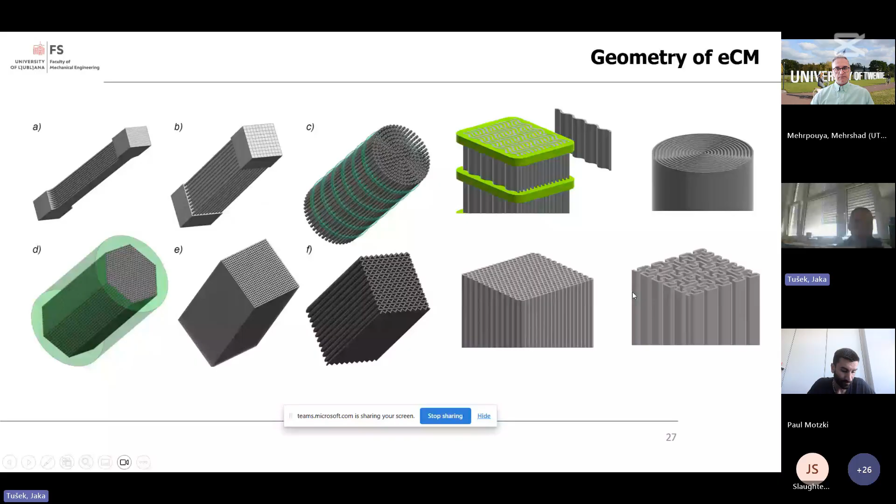What we can see is that especially when working at higher operating frequencies, something like 2 or even 4 Hertz, one should have a high specific heat transfer area to reach better performance. Our system, as I'll show later, has a specific heat transfer area of 4.5 square centimeters per gram, which places us here. This plot shows enormous potential for developing more efficient and advanced geometries with higher specific heat transfer area for elastocaloric technology.

The same goes for the COP, especially if one wants to operate at higher operating frequency, which is the goal - at least reaching a frequency between 2 and 4 Hertz.

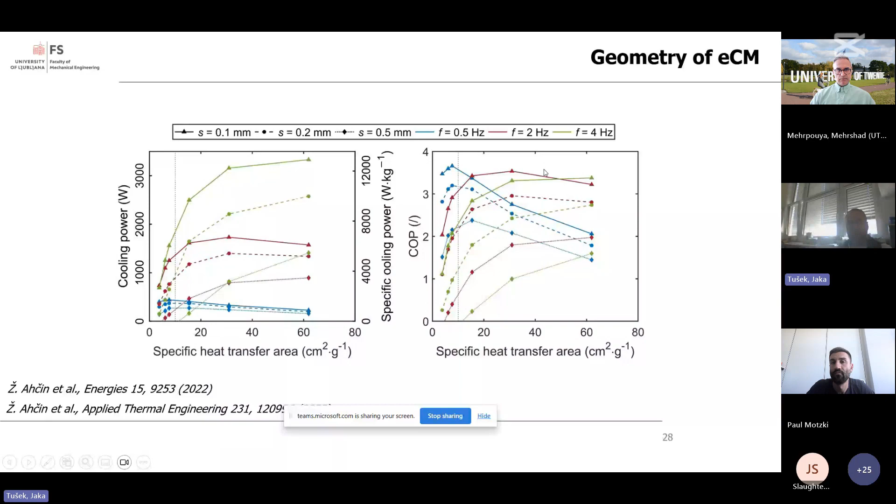But those geometries, especially thin elements, can only be applied in tension, which has fatigue issues. Our tube-based geometry has relatively poor heat transfer area, but it could be almost doubled if the inner surface of the tube were also utilized, which it is not, as I'll show later.

This plot also shows two, or even three, very nice geometries from the group of Professor Qingping Sun from Hong Kong. They recently designed very innovative elastocaloric regenerators with novel geometries, showing it's indeed possible to develop geometries with a very high specific heat transfer area that can be used in compression.

Now let's add to this plot the geometries we are currently developing, from honeycomb structures to spiral, corrugated sheets, or Hilbert structures. Essentially these fall on the same line as parallel plate geometry, because they are a version of a parallel plate geometry, but with so-called geometrically induced stability—they are not flat but have curvatures inside, which can improve buckling stability.

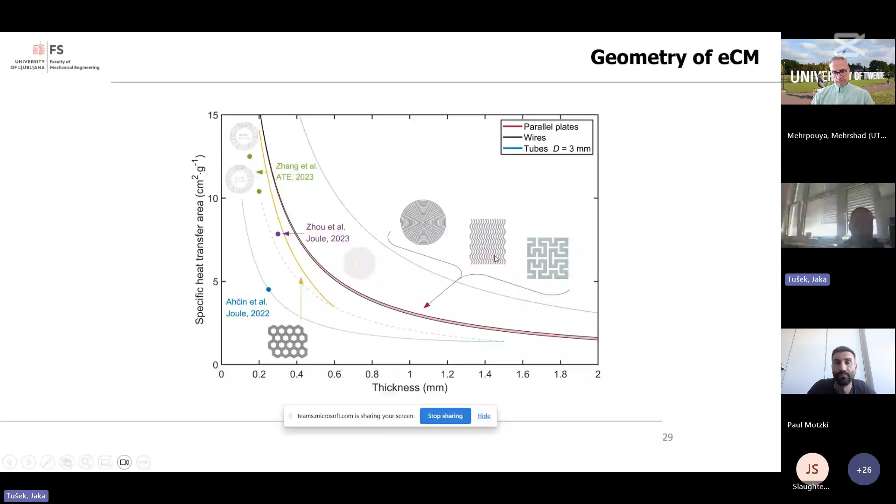Hopefully some of these geometries will prove to be very efficient elastocaloric regenerators loaded in compression. Okay, finally let's talk about the driving system, which is maybe the most important part of the elastocaloric device, in addition to the elastocaloric regenerator. There are different options—I think Julie talked about this a bit before me.

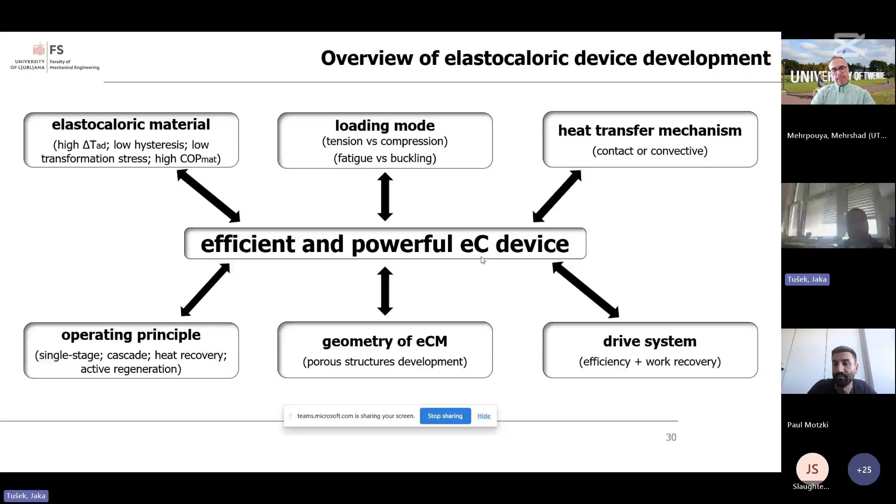One can use pneumatic, hydraulic, linear motors, piezoelectric devices, or devices based on screw jack or crankshaft mechanisms, essentially driven by an electromotor. From the efficiency point of view, the best choice is probably electromotors, which show efficiency up to or even above 90%.

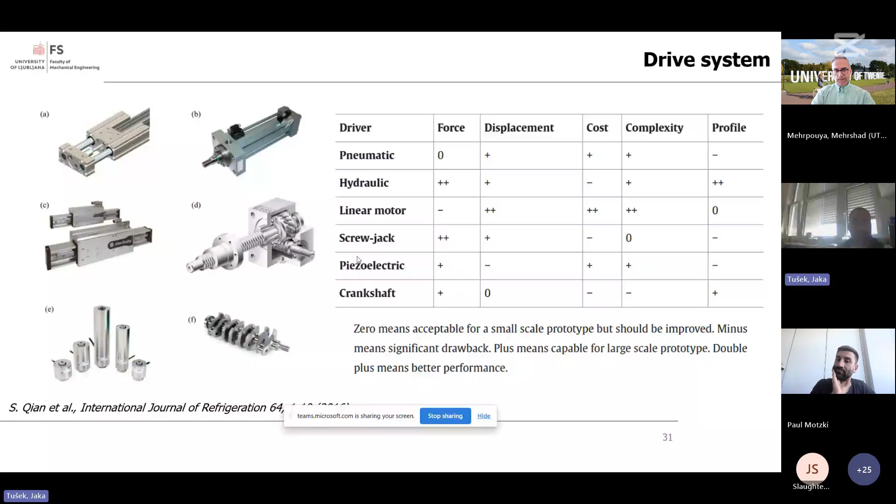So we designed an elastocaloric driving system based on a rotary electromotor with a cam disc that loads and unloads four phase-shifted elastocaloric generators, with the goal of work recovery. As mentioned by Julie, a precondition for an efficient elastocaloric device is that energy released during unloading is efficiently used by directly loading another antagonistic pair regenerator on the other side of the system.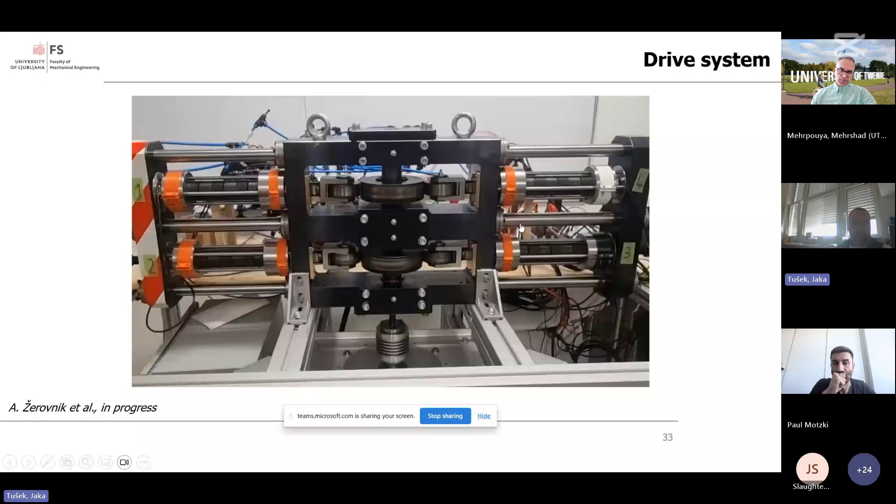We also evaluated the work recovery efficiency. Of course, if there were no friction, the entire energy released would be used by another regenerator. But we have two bearings in the system and very high forces, and this results in only 60% of the released energy being actually used efficiently, which is not yet the goal but is a decent value. We would like to be at 80 or 90%, and we have some ideas how to further improve that in the future.

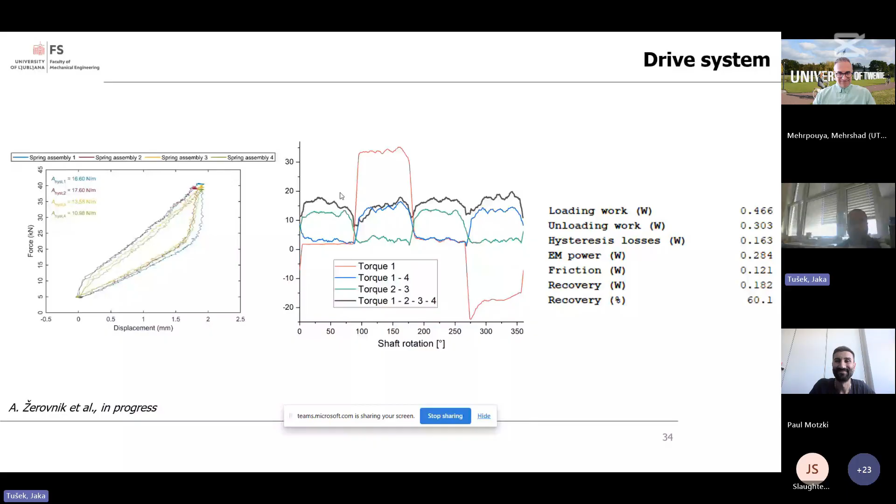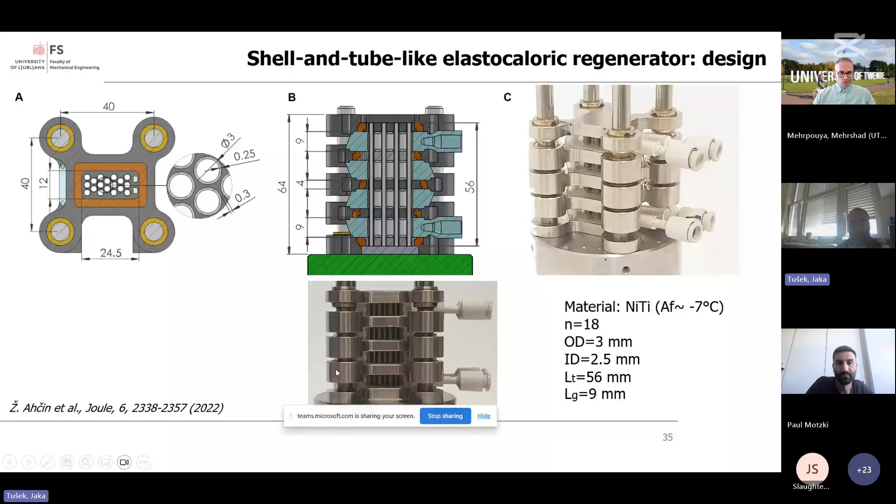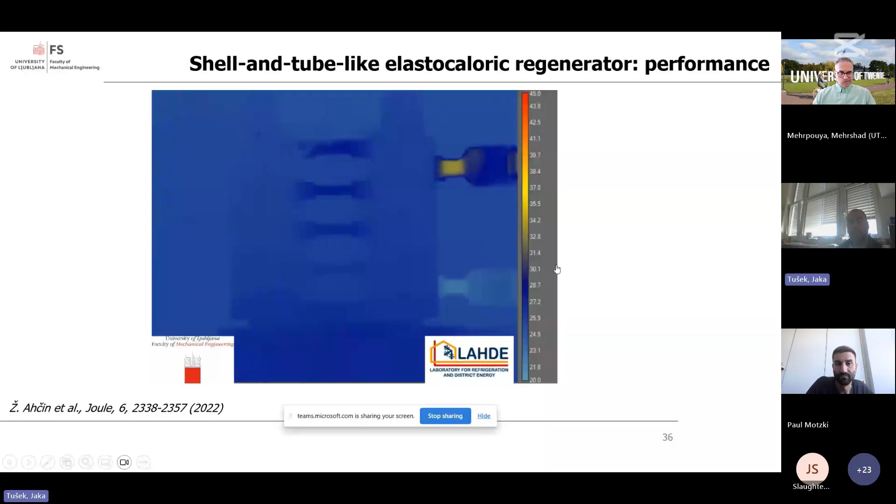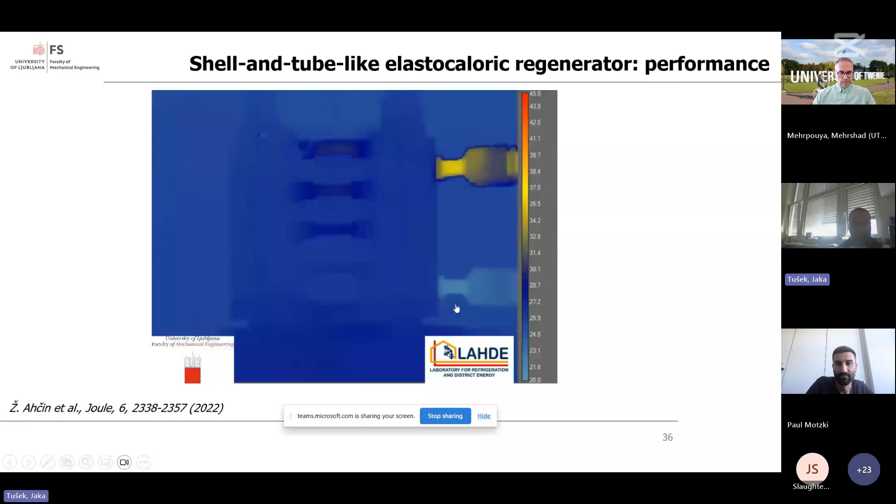Here is a video showing the operation from the initial state up to steady state conditions in a heat pumping mode. As you can see, the temperature profile starts to build and will reach steady state conditions after a certain amount of time. The cold side temperature is around 20 degrees, and the hot side temperature is about 45 degrees, meaning in this case we reached 25 kelvins of temperature span in the heat pumping mode.

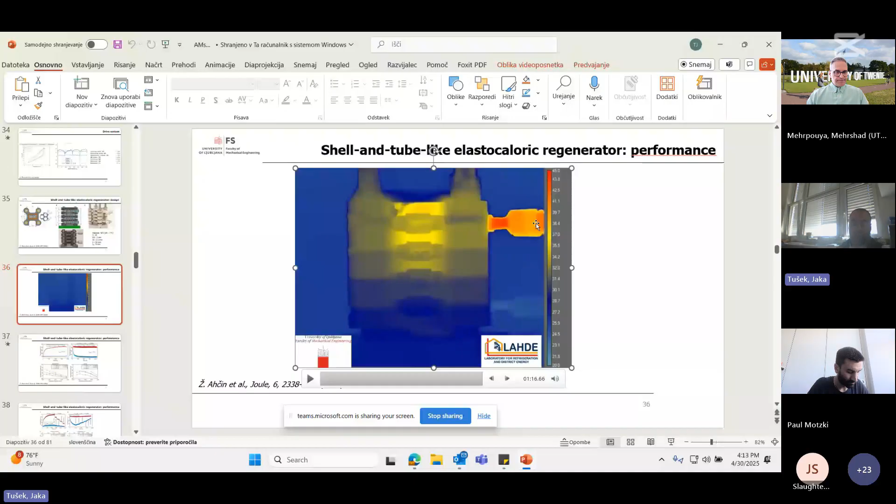We tested this device in both heat pumping and cooling mode, where we reached 31.3 kelvins in the heat pumping mode, and half of that in the cooling mode.

We couldn't go lower because the AF temperature of our material was a bit too high for a cooling device, so we didn't want to go below AF temperature. We had tested this system at different mass flow rates and different operating frequencies up to 2 Hertz.

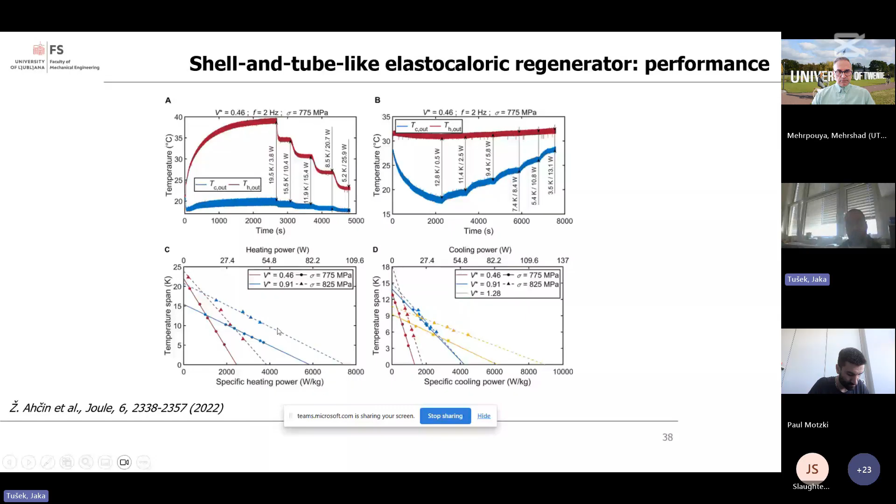We tested the system also by adding the cooling or heating power. As you can see here, the device could generate more than 50 watts of heating and cooling power using only 13 grams of nickel titanium, which corresponds to more than 4,000 watts per kilogram of specific cooling and heating power.

We evaluated the system also from the efficiency point of view, so from the COP and the exergy efficiency, which is the ratio between the actual COP and Carnot COP, the theoretically maximum COP at which the cooling device could operate. We are not yet better than vapor compression, which normally operates with exergy efficiency up to 30%, but we are not that far considering this is new technology compared with the state-of-the-art.

So we reached the exergy efficiency of around 11%, but there is significant room for improvement, as I discussed before, particularly in terms of more efficient elastocaloric material and more efficient geometries of the elastocaloric regenerators. So thanks, that's all from my side.

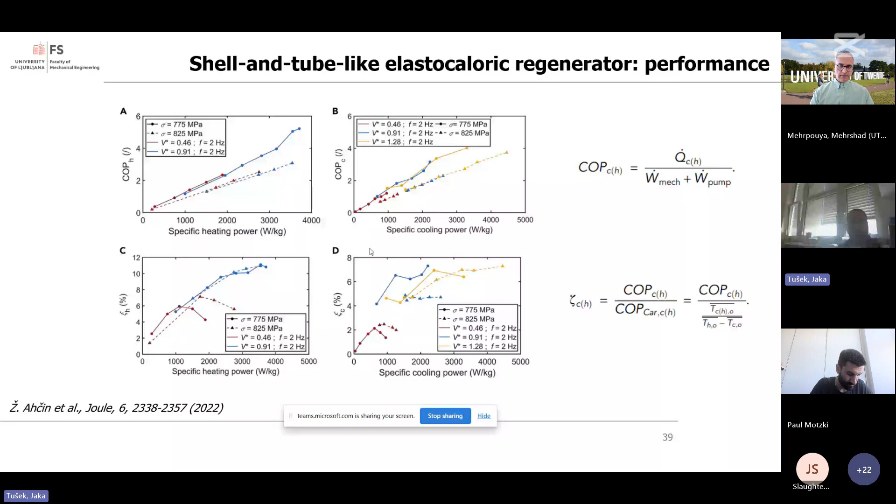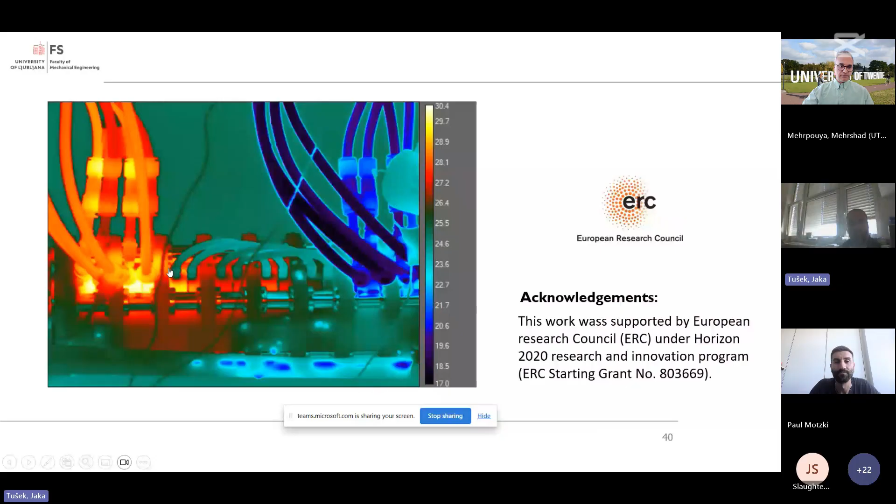This is just a video that demonstrates the operation of the elastocaloric heat pump, where you can see how heat is actually pumped through the elastocaloric regenerator in this IR image or video. So thank you.